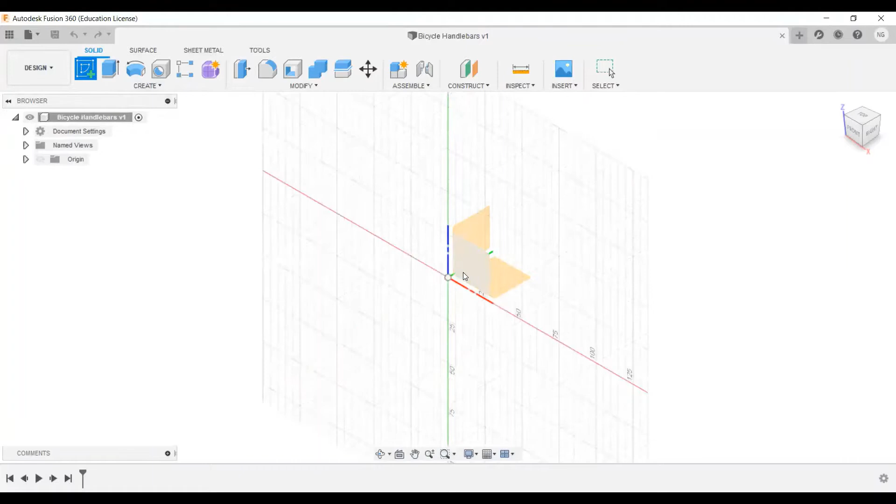Okay, everybody, so we're in a new model file. In the design environment, I'm going to go and save this as bicycle handlebars into the admin project in the cloud. Hit save. So we've got a fresh new design file now. Okay, so I'm going to go right ahead and create a sketch. I'm going to pick this front plane. It brings it normal to view.

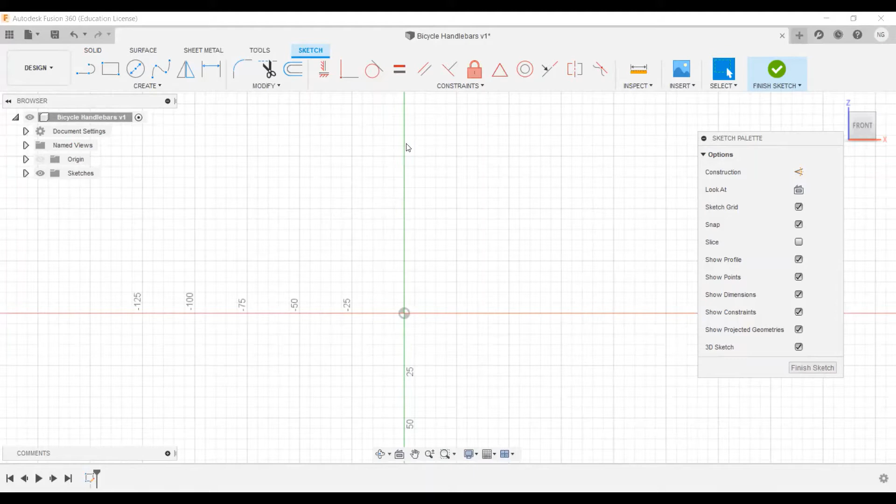Now, looking at the sketch tools last week, we were just able to sketch in 2 dimensions, so either on a flat plane or a flat surface. For these, we're going to need to create a 3D sketch. Now, when this sketch palette comes up here, if you notice at the bottom, there's a 3D sketch that's unchecked. I'm going to go ahead and check that. Now that's going to enable me to start sketching in 3 dimensions. So when I hit line, you'll start to see these kind of additional control functions coming up.

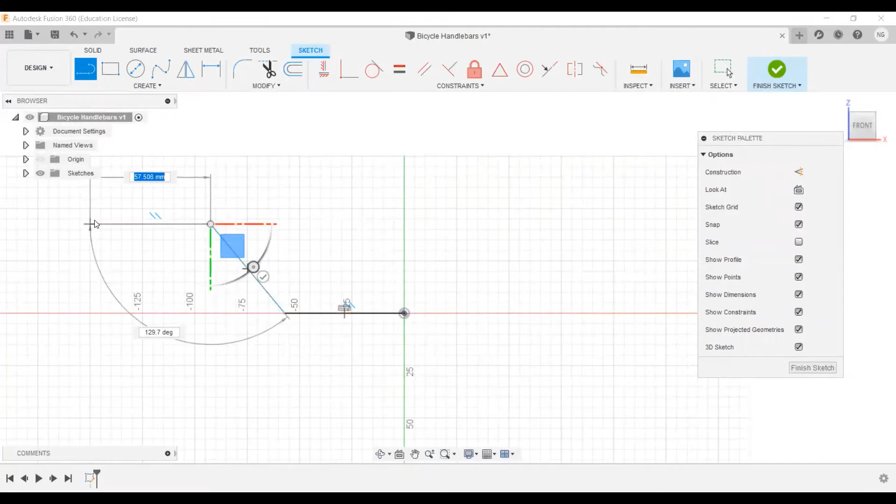Okay. So I'm just going to create 3 lines, just like that, and hit finish sketch. So right now we've just got a 2D sketch because I just sketched it all on the same plane. Click on front to bring it normal to view again. I'm going to go to the history tree here at the bottom, right click that sketch and edit.

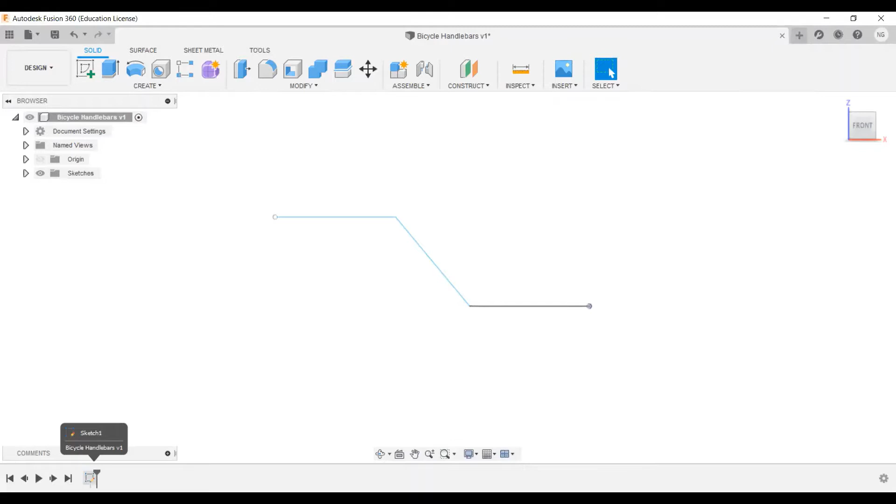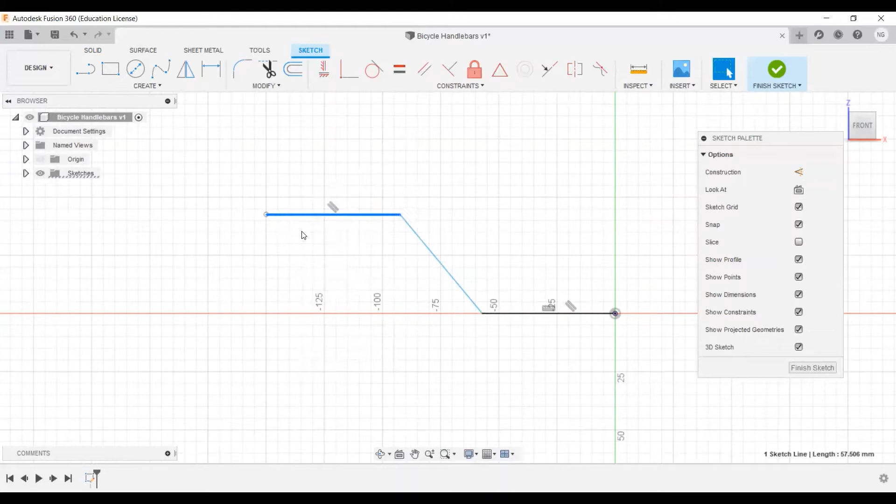Now what I'm going to do, I'm not going to dimension this just yet. If this end of the line here is the end of the handlebars, if you like, I'm only modeling half of this for the moment. I'm going to take this line, I'm going to right click it and hit move copy. I'm going to spin it round, I'm going to move it backwards from its plane by 30 millimeters and hit enter. Okay, so now we've got this 3D sketch basically.

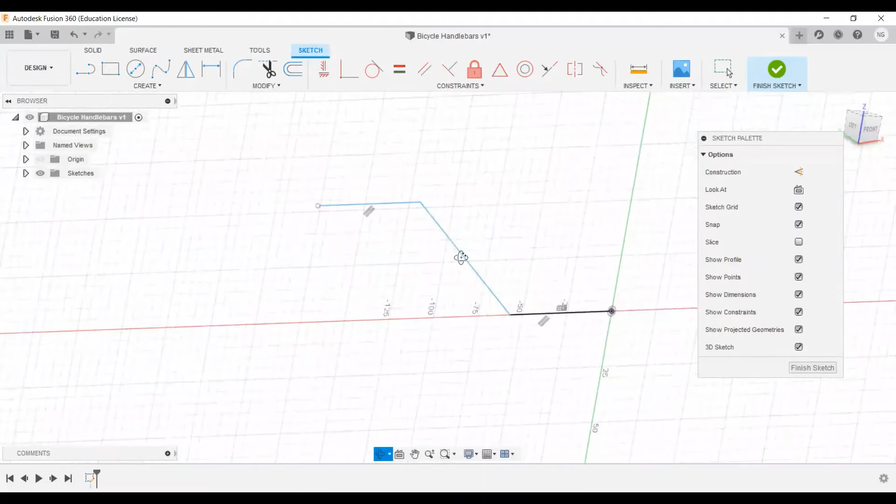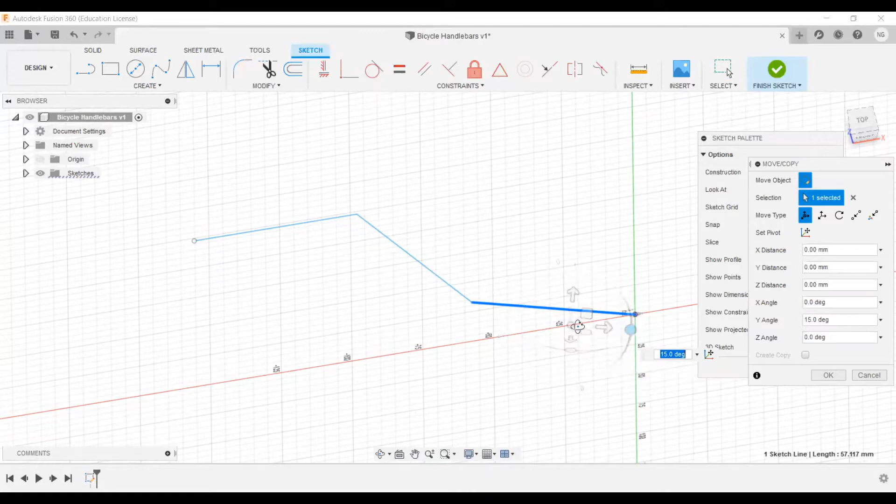The other thing I'm going to do is right click on this end and I'm going to move copy and I'm going to move that a little bit by 15 degrees in this plane here. Okay, and hit enter. So I'm going to go normal to the front view again.

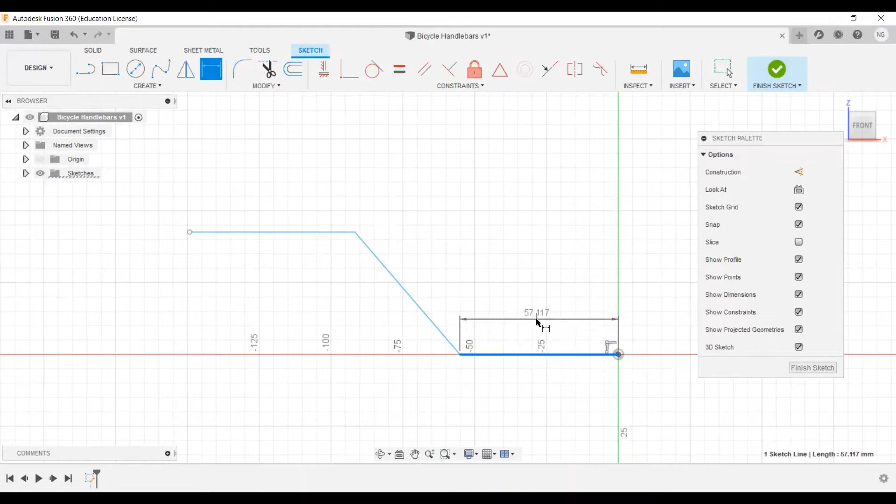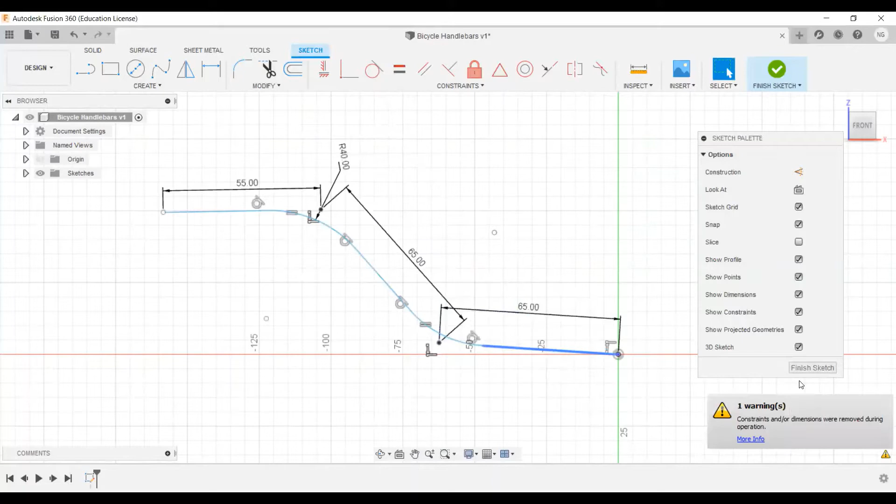Now I'm going to add some dimensions to these. I'm going to make that line 65 millimeters. I shall make this line also 65 millimeters and this line 55 millimeters. I'm then going to put 2 fillets on, one on that corner, one on that corner, and I'm going to make that a 40 millimeter radial fillet and hit enter. Okay, so now as you see, we've got this kind of funky 3D sketch shape. Okay.

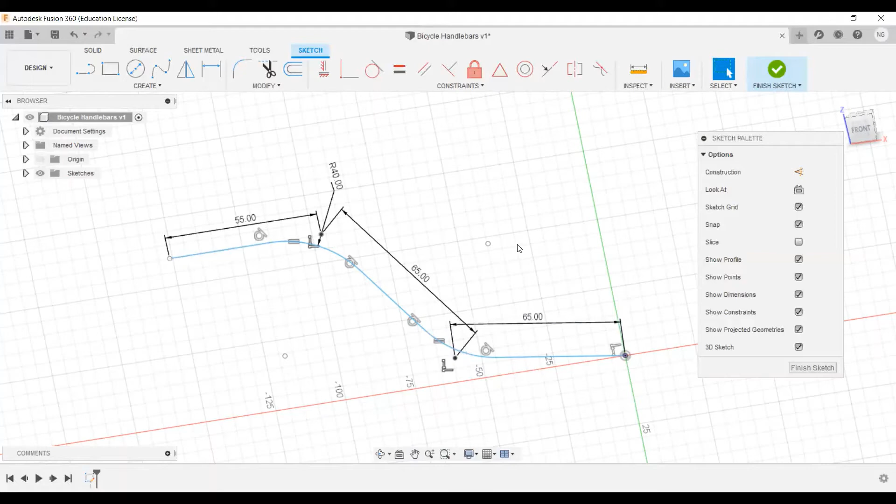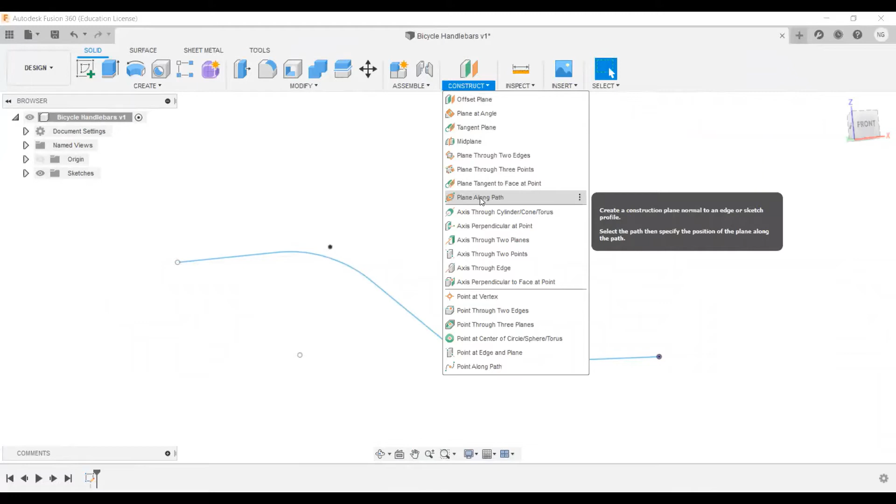Now I want to sketch some geometry at the end of this path, either end. There isn't a suitable plane in our origins, so I'm going to have to create a plane. If I finish the sketch first, I go up to construct, and I'm going to put a plane along path as we did last week. I'm going to select this path, and much like last time, it gives me a decimal place along the path. I'm going to make that 1 so that it's right at the end, or I could make it 0 and it will be at the other end. Okay. So now we've got a plane perpendicular to the end of that path.

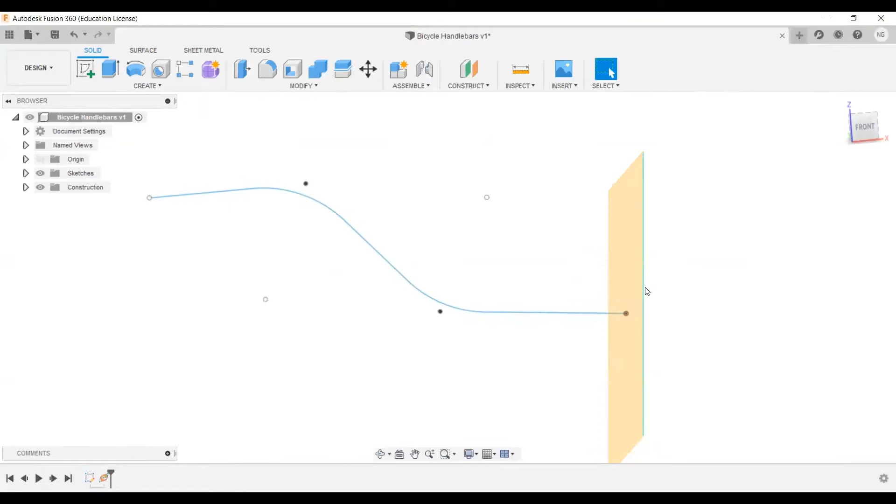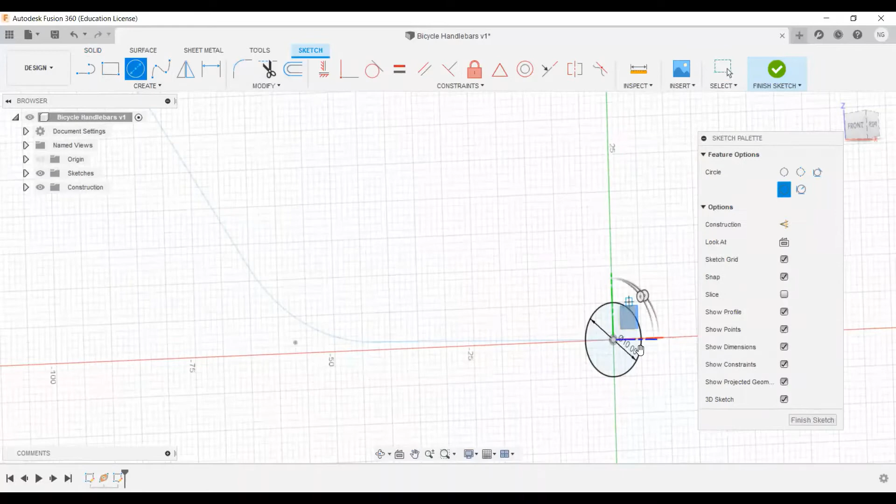I'm going to sketch on that plane, the newly created one, and I'm going to put a circle there. And it's going to be 10 millimeters in diameter. Zoom in a bit, and another one inside it, which is going to be 6 millimeter diameter. And I'm going to finish the sketch.

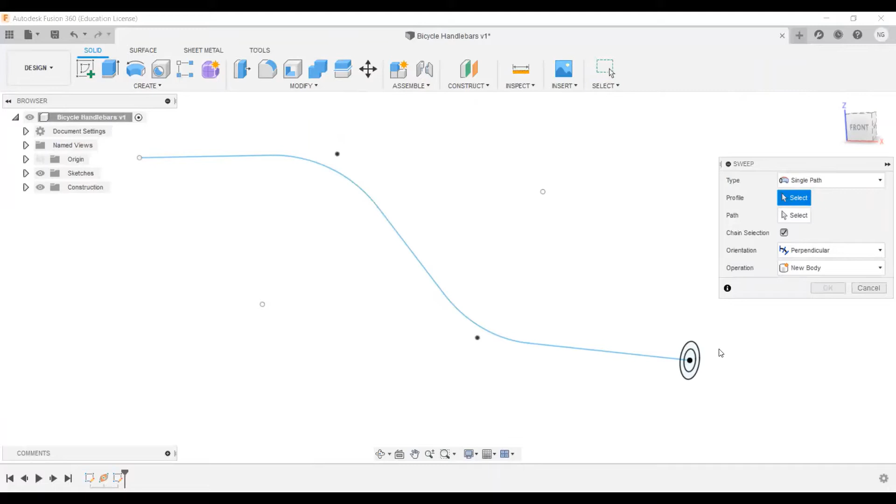Now I'm going to use the sweep command. I'm going to keep it on single path. It's asking me to select the profile. So I shall select that annulus there between the two circles, and then I'll hit select path and I'll choose the path. And as you can see, we've got the start of our handlebars. I'm going to keep the operation as new body and hit OK.

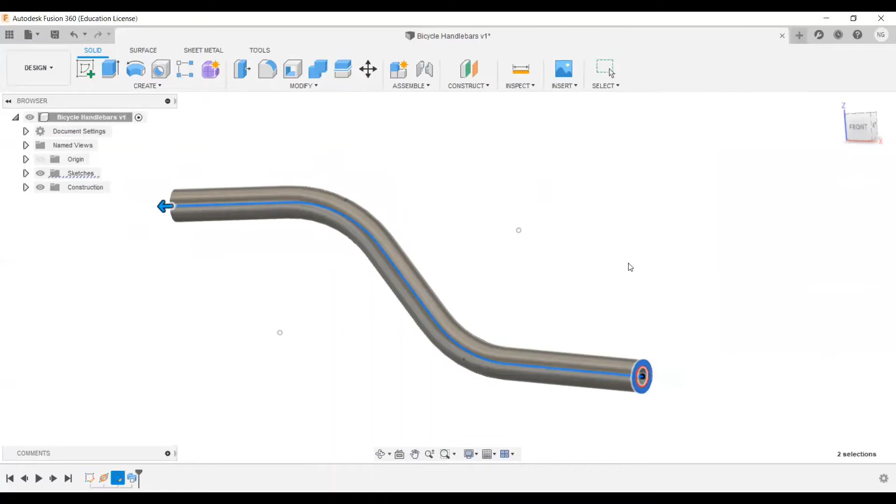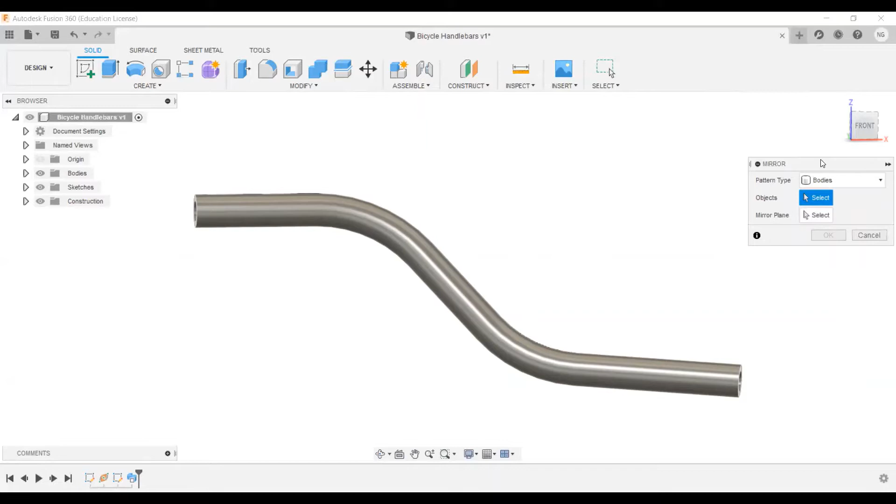All right. Now I am going to mirror that or reflect it. If I go to the mirror command, pattern type is set to faces, or it's defaulted in this case to faces. I'm going to choose bodies. And then I'm going to pick the body as it's asking me to. Select the object. And I'm going to click select the mirror plane, and I'm going to choose this end face just here. And hit OK. There we go.

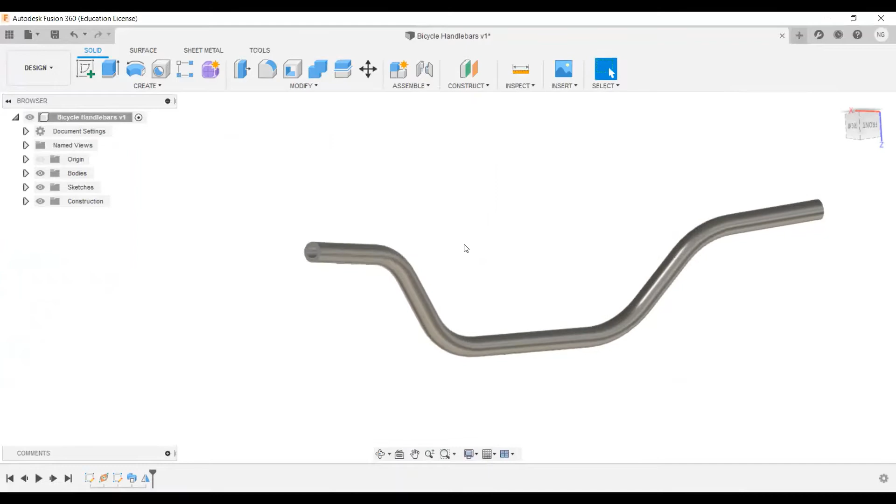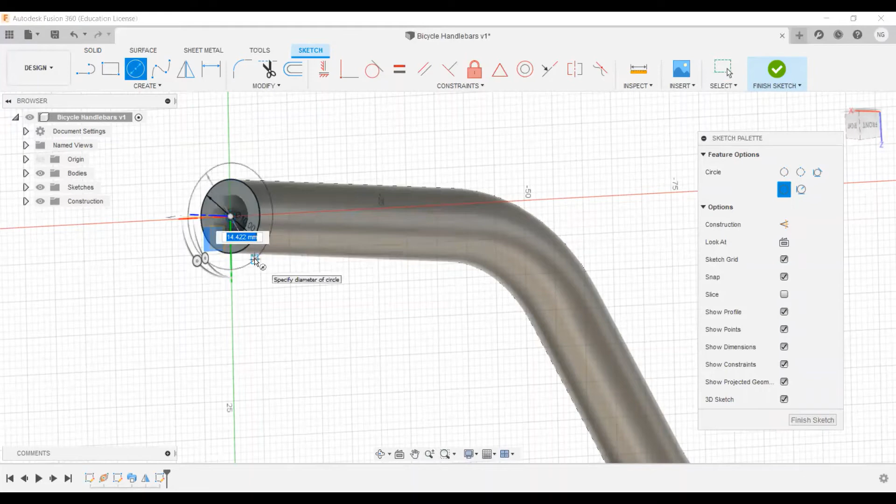Now for the handle grips. So I'm going to create another sketch on this end face. And I'm going to make a circle of 10 millimeters. And another one of 14 millimeter diameter. And then I'm going to finish that sketch.

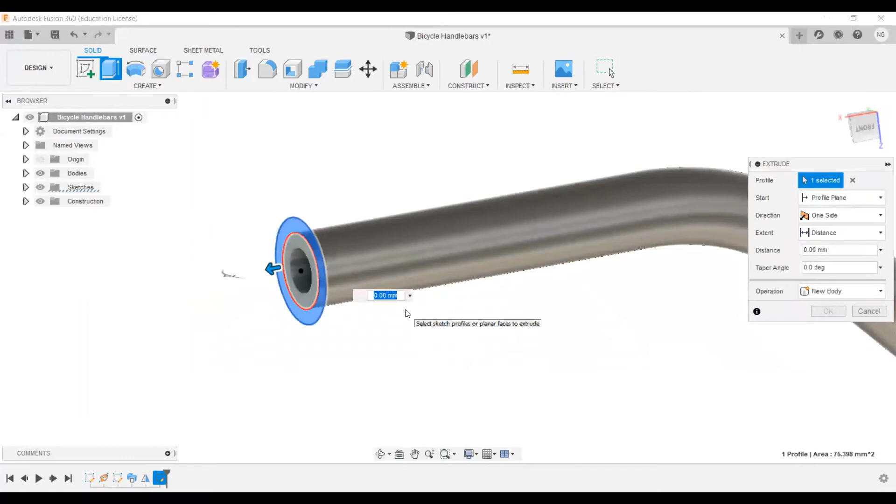Now I'm going to go to the extrude function. And I'm going to select, again, those two circles to give me the annulus. And I'm going to go backwards, so -40. And I'm going to choose the operation as a new body, so to separate it out from the actual handlebars. And hit OK.

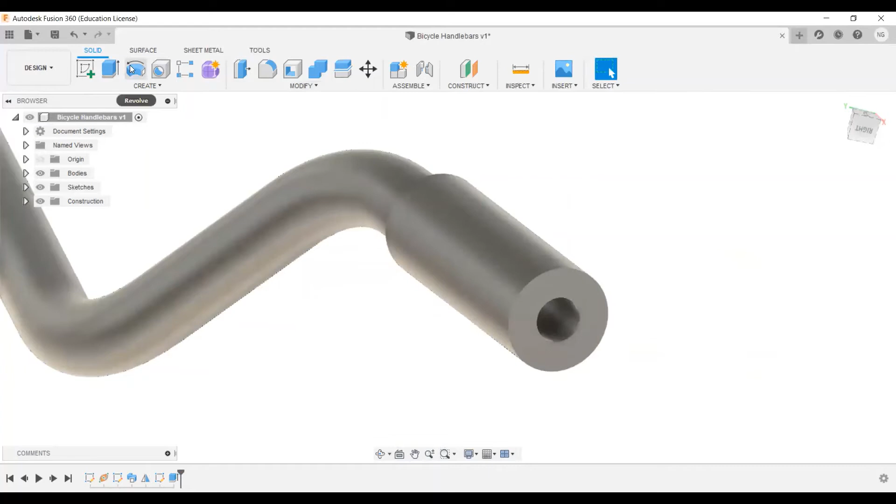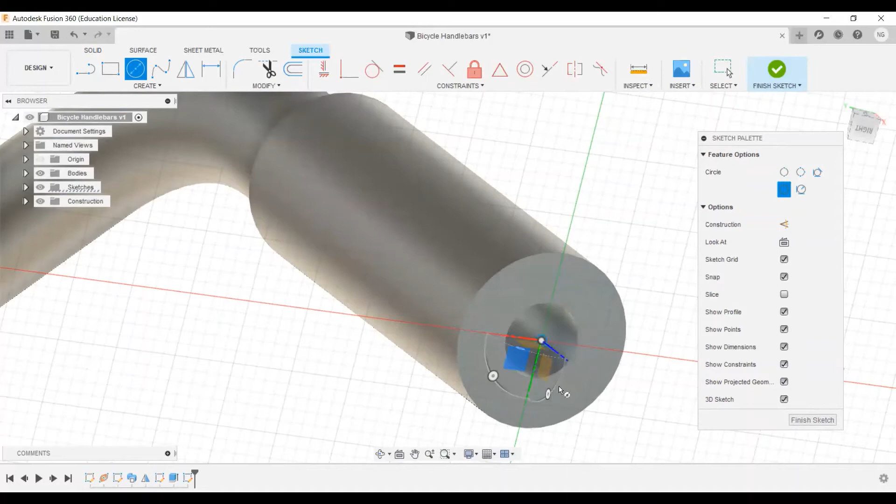And then I'm going to sketch on this outer surface, the part we've just made. And I'm going to click a further circle. Which will be, sorry, start that again. Delete that sketch. Try again. Sketch there, make a circle. And make that 12 millimeter diameter. And finish the sketch. And I'm going to extrude that.

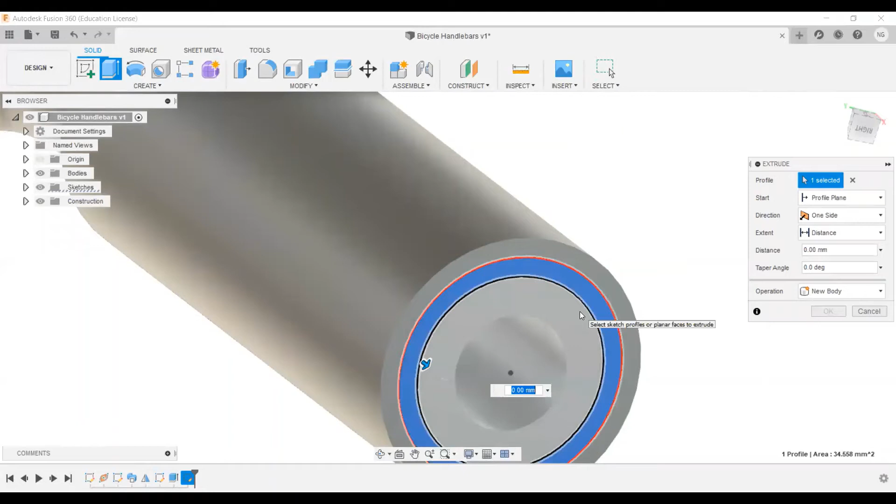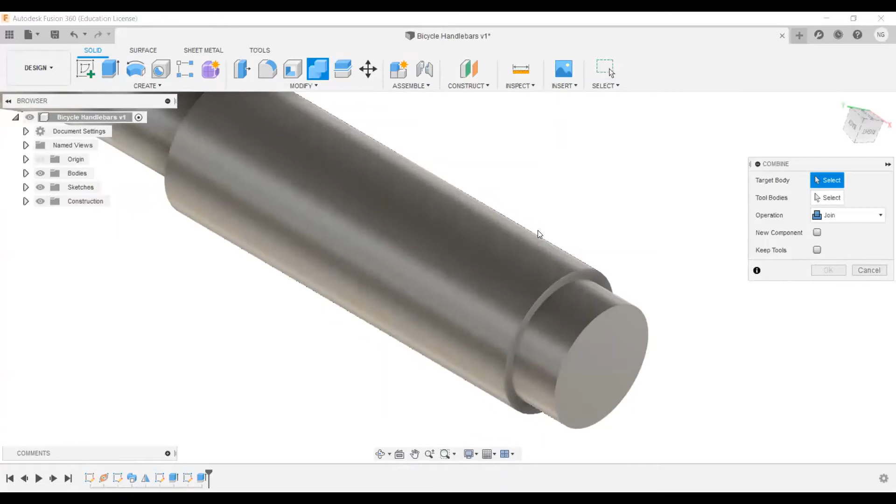I'm going to have to pick both of those for the moment. So what I shall do is create that as a new body, and I'm going to extrude it 5 millimeters. Change that back to new body and hit OK. I'm then going to go and use, in this modify area, this combine function, because this is a standalone body. I'm just going to combine this body with the main handle. So the target body is this, and the tool body is that, and it's a join command. Okay.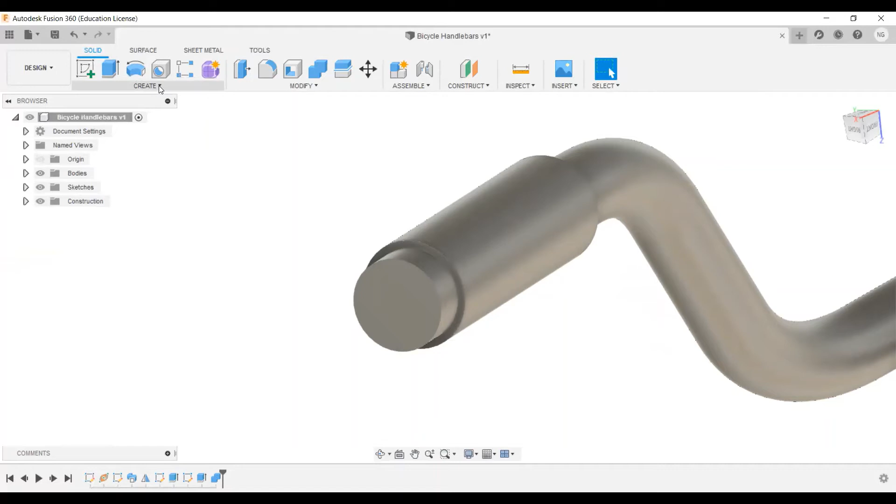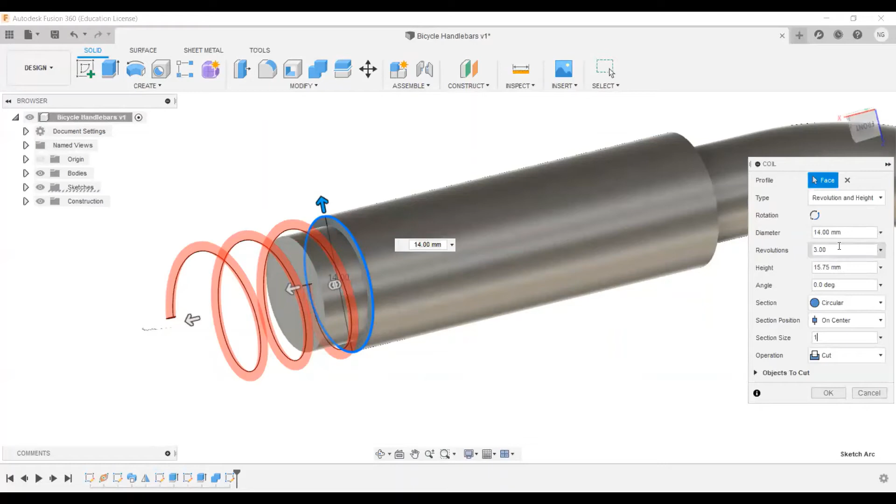Now I want to put like a knurled effect on the hand grip. So what I'm going to do is to use the coil tool. I'm going to sketch on that face, choose the center, and make it 14 millimeter diameter. Okay. So the diameter is set at 14 millimeters, the outside shape. I'm going to make the section size 1 millimeter. I'm going to make the revolutions 0.5.

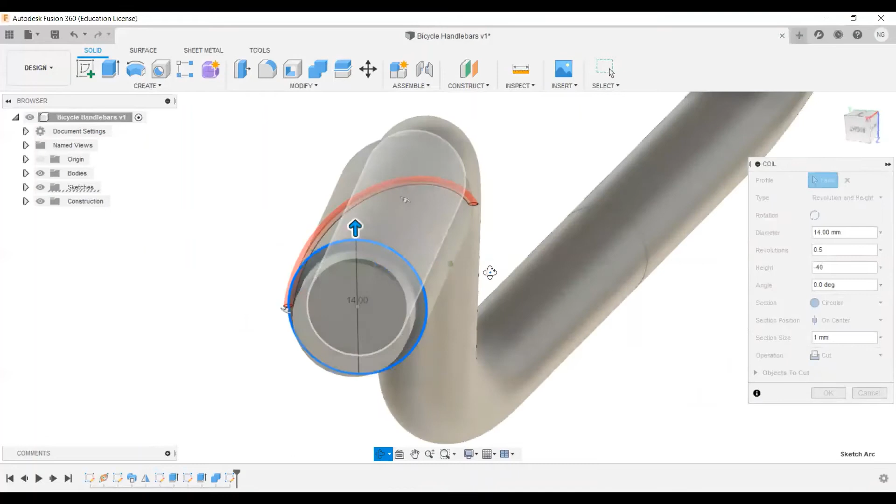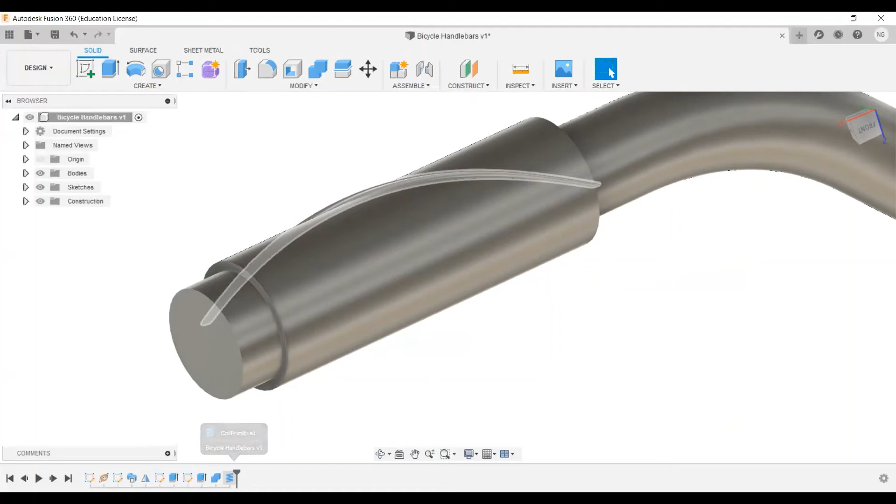The height will be -40. So I want it to go back into the part. And it's not going to be a cut, it will be a join. No, actually, I'm going to make that new body and hit OK. Sorry about that. If you just hit join and then hit OK, just go back into the coil here, edit the feature, and you can change that back to new body. Okay.

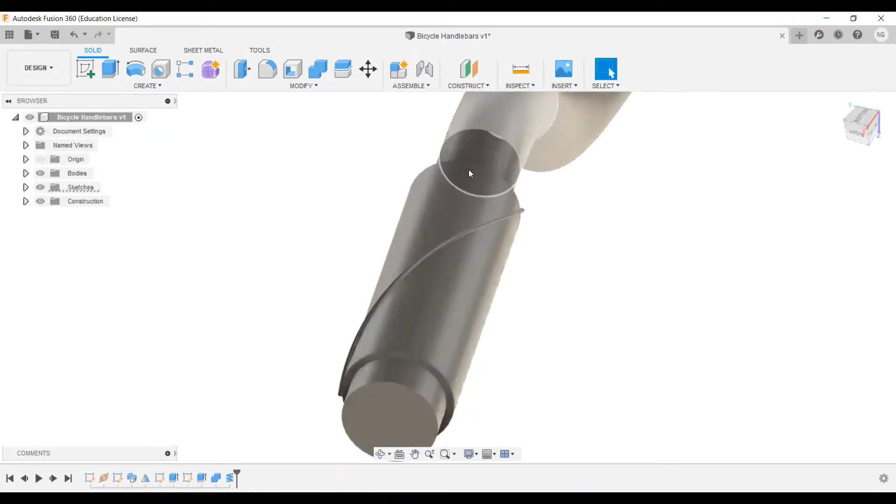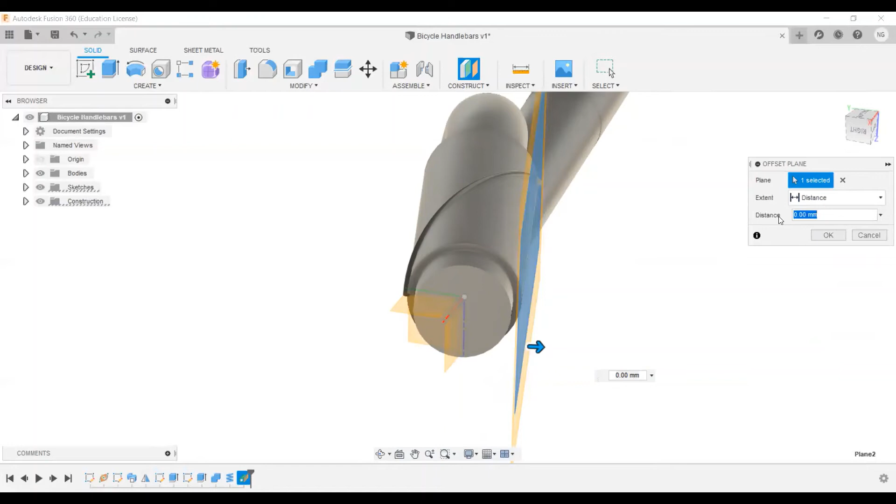I then want to reflect this new feature on itself. I'll show you what I mean. I need a plane going straight through the center here. So I shall first of all make a plane tangent to this face. I'm not going to change the angle, I'm just going to say yes. So you can see that plane is touching that face now. I'm then going to offset this plane I just made by -14. So we've got 2 planes either side of this handle. Say yes to that. And then finally do a mid plane, and I shall select these 2 planes. Hit OK.

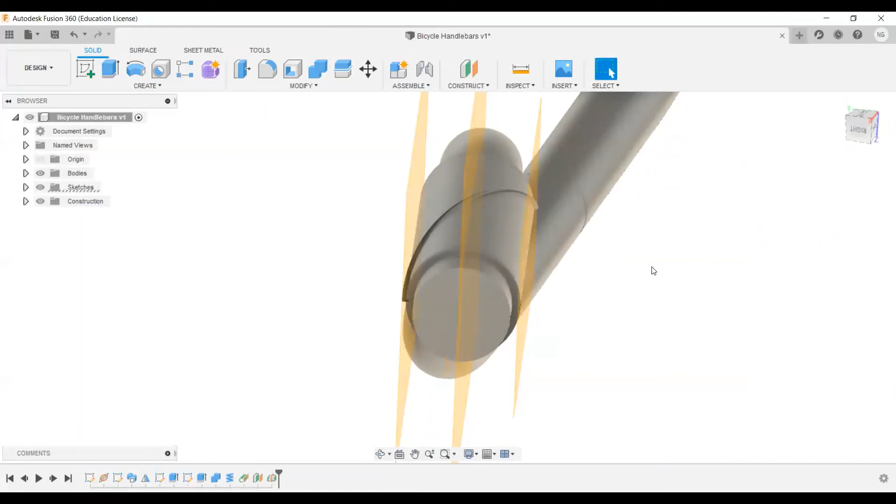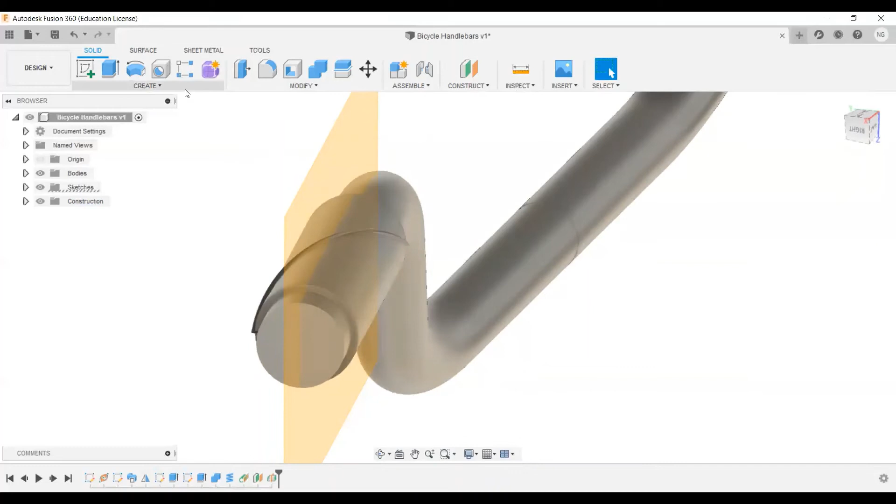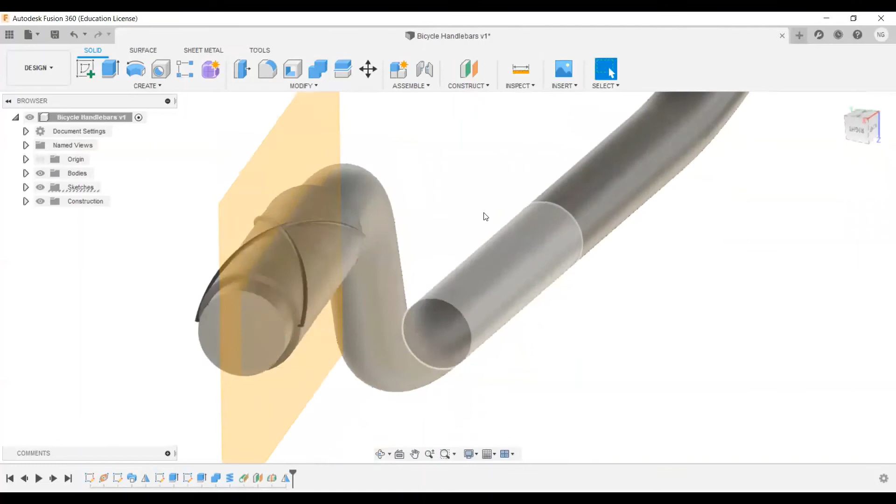Now I don't need these outer planes, so I'm going to right click and show hide, right click and show hide. Oops. It doesn't delete them, it just hides them. Now I'm going to go back into the mirror function, and I want to mirror a body, which I shall choose this helical feature, and the mirror plane I shall select is this one in the middle, and hit OK. Once I have that, I'm going to right click this plane and hide that also. If it doesn't disappear immediately, just click into the background and it should disappear.

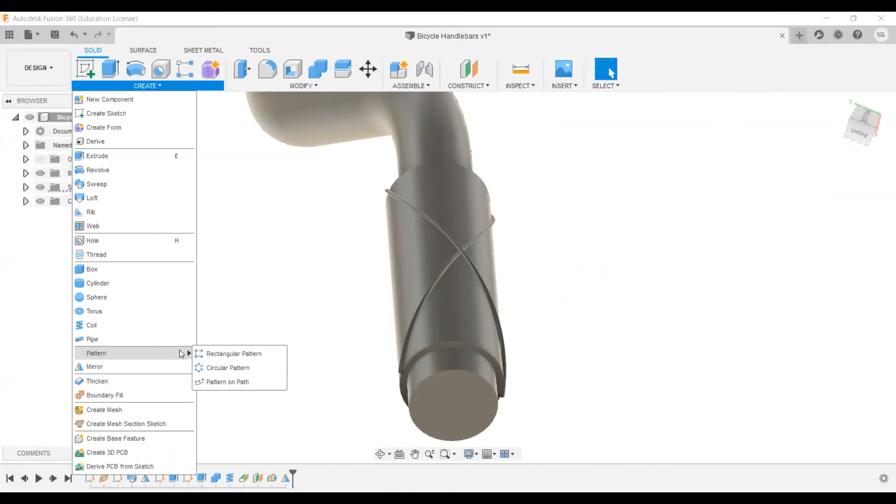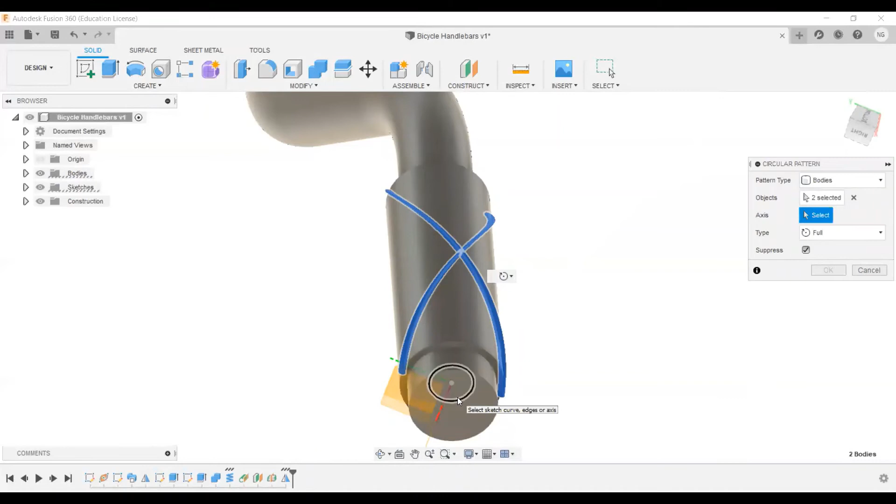Now I'm going to use a brand new function that we haven't looked at yet, which is pattern. It's under create, and I'm going to do a circular pattern. I'm going to change the pattern type to bodies so I can pick these 2 objects. It wants me to select an axis here, and I'm just going to choose any of those circles, because it should recognize that that's the center. The center of the circle is the axis.

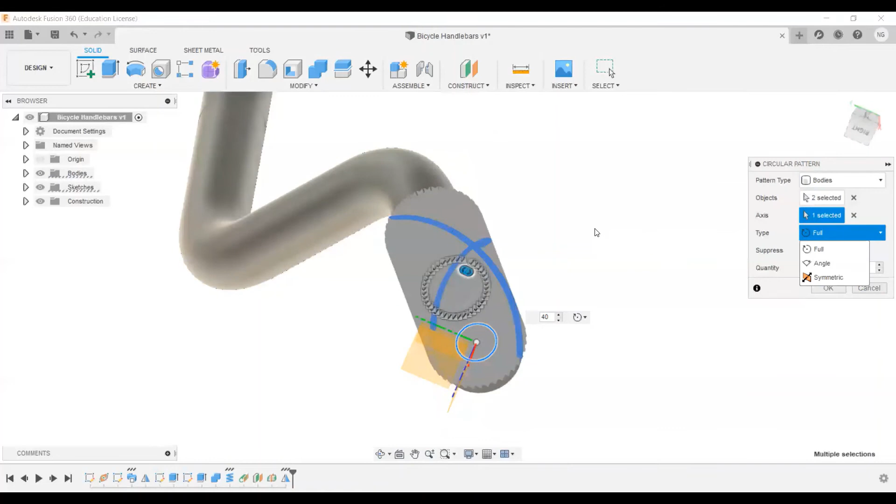And how many of these? I'm going to make 40. Okay. And the type is fully around. I could set that to some angle, 180 degrees round. I'm going to make it 360 degrees and hit OK.

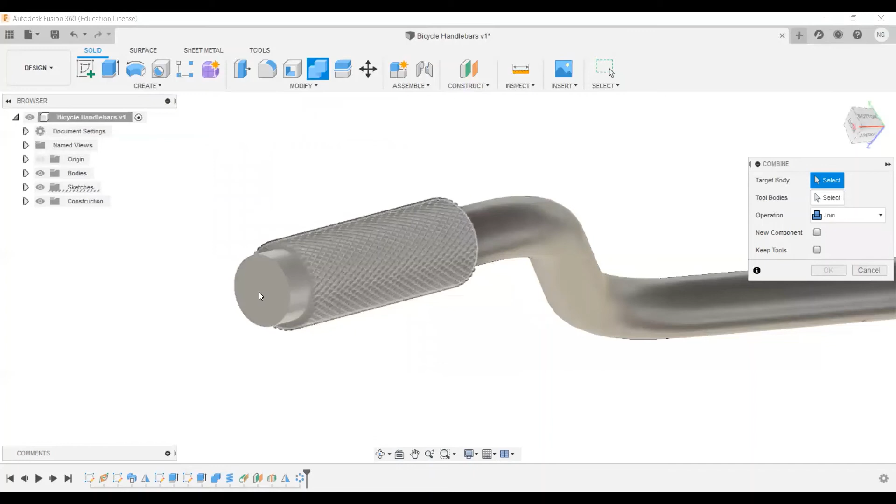And as you see, we've got this knurled effect. Okay. Now, these are all individual bodies now. So what I need to do is join them into the actual handle itself. So if I pick combine, I'm going to pick the target body as the handle. Now I'm selecting the tool bodies and I'm just going to drag the window round to try to capture all of those at once. That's going to take a little time.

And once this is completed, I can go and reflect or mirror this handle via the center so that it reflects it onto the other side. So it tells me in tool bodies now that it's got 80 selected. That makes sense. So we had 2 and we made 40 copies of 2. And I'm going to keep the join operation on and hit OK. Again, this may take a few seconds. I apologize for my processing power.

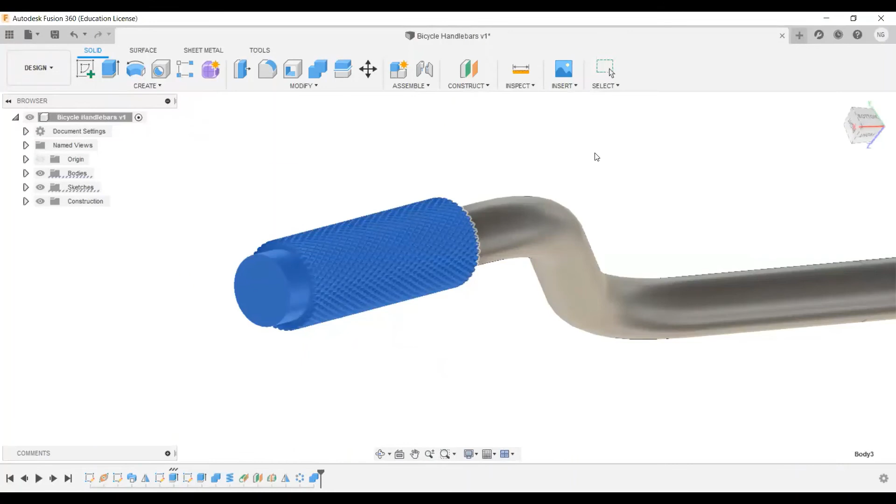So after we've reflected this handle grip, we're then going to take this part into the render mode and assign some material and see how it looks. Okay, I think that's pretty much done now. So I should be able to mirror that across the central plane. I haven't joined these 2 handlebars together yet, so I can do that afterwards.

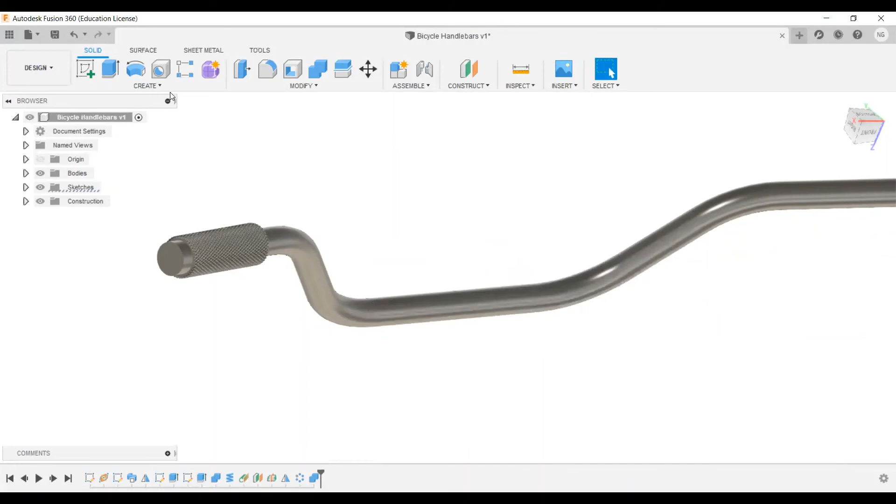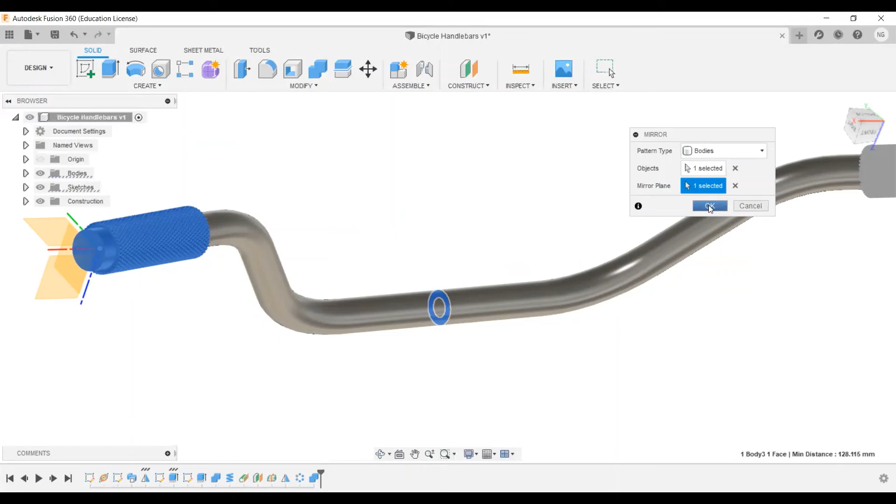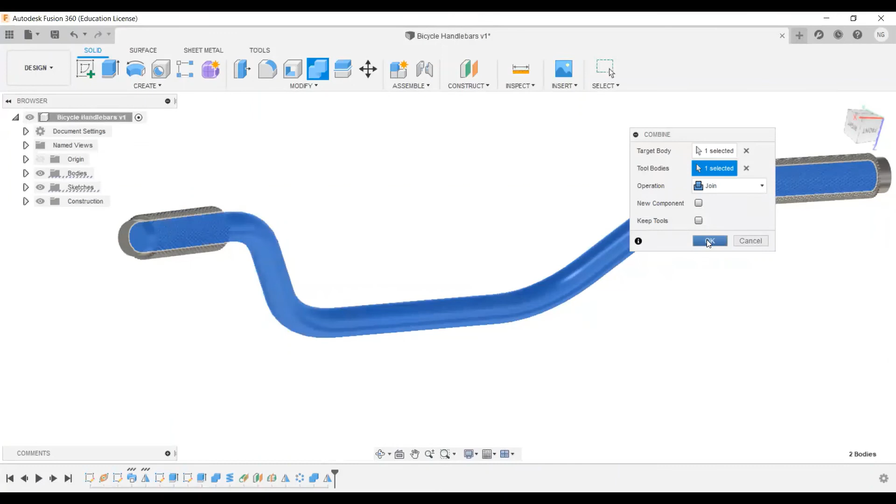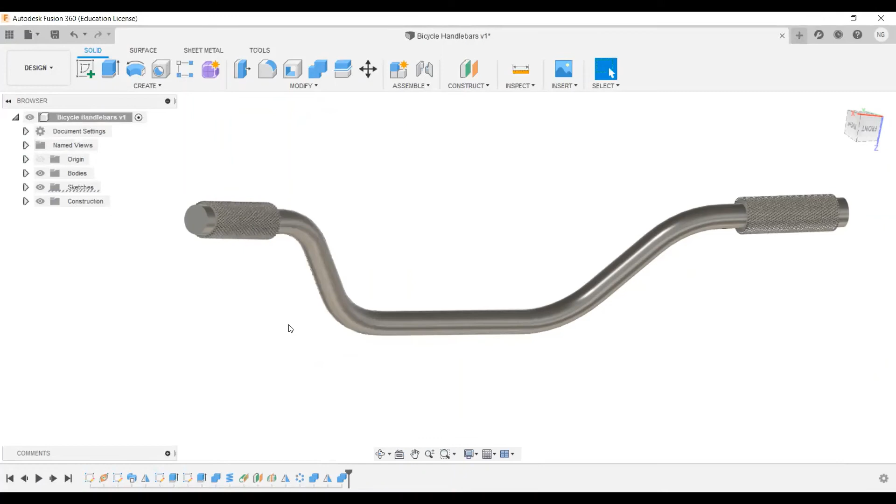I want to assign some material before I go into render actually, so I'm going to go down to the modify pull down, go to appearance, and I'm going to open up, so if I've got Fusion 360 appearances, I'm going to open up metal and aluminum, or aluminium in my country, in England. And I'm going to choose aluminum polished, and I'm just going to drag that onto this part.

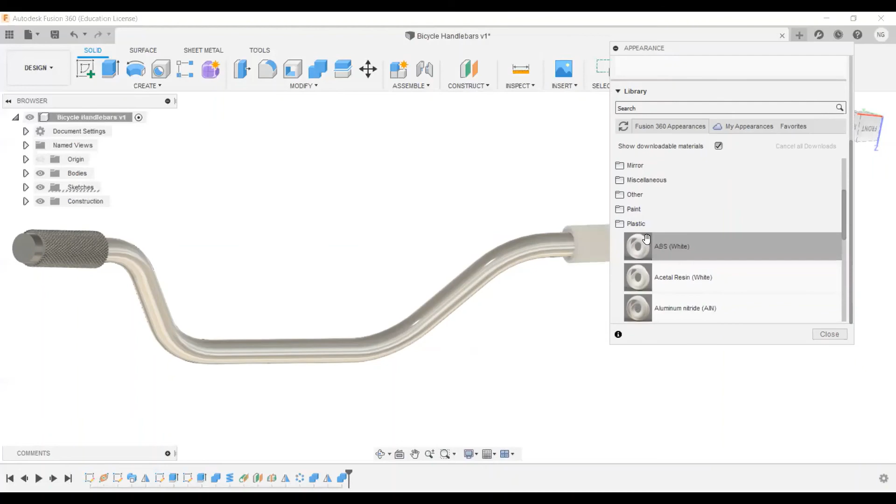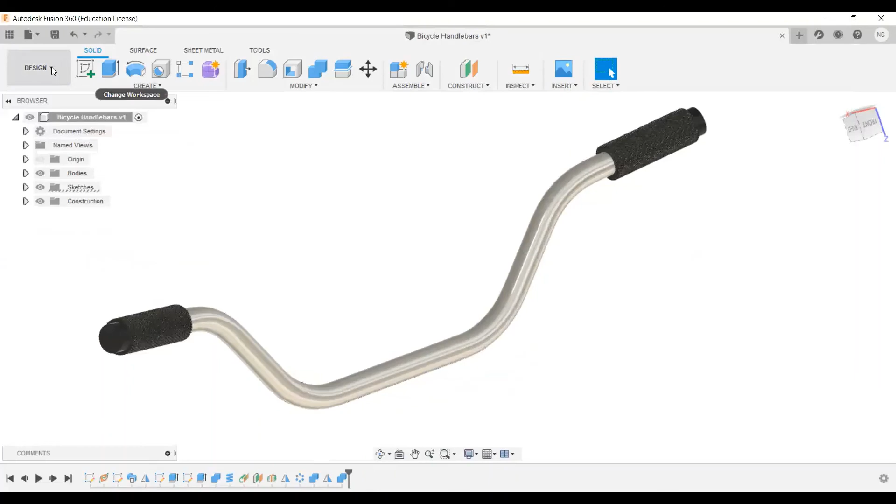I'm then going to go to plastic, and I'm going to drag ABS white onto each of these grips. And that ABS white shows up in the design. This is all the materials that are used in this design. I'm going to double click it and turn it almost black and hit done. And there we have our handlebars, but we're not quite finished yet. I'm going to go into the render mode out of design environment. Gives you a slightly better view.

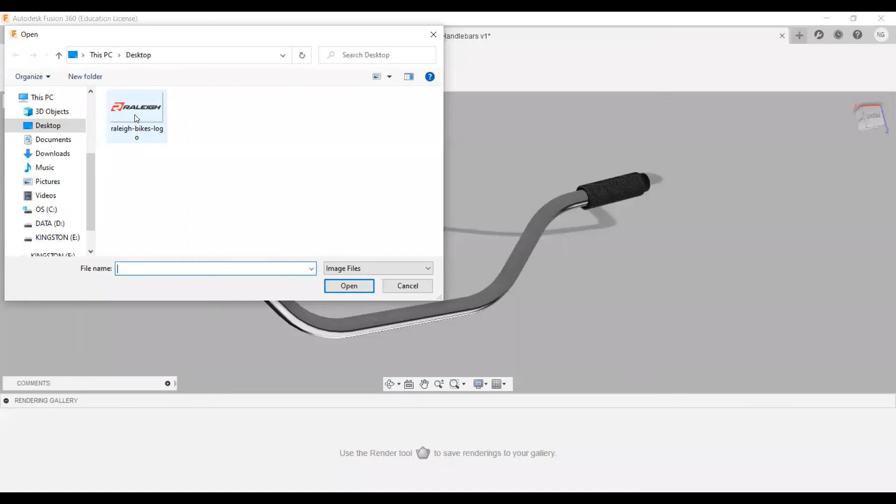I downloaded a Raleigh bike logo just from the internet, first one I found, just to show you this decal setting. I can insert that from my computer. It's just on my desktop. There it is. Click that, hit open. Now it's asking me to select a face to pop that onto. I'm just going to choose the central section of the handlebars. There you go, you can just see it there.

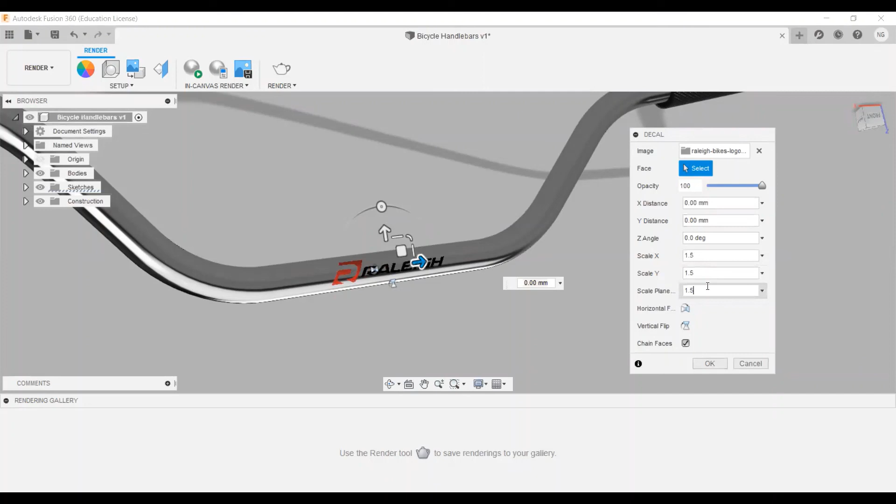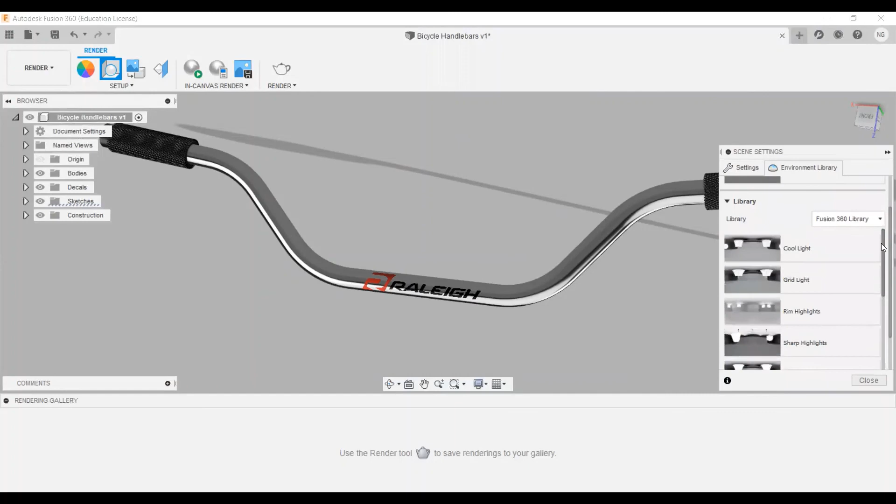Slightly too small, I'm going to make it 1.5. Scale it up in X, Y, and Z. Well, I'm happy with that. You can play around with the opacity, but we're not too interested. Just hit OK. And there we have our handlebars. And as before, we could do an in-canvas render. We could play around, first of all, with the scene settings. You can change the environment and the light source. Okay. I'll leave you to have some fun with that.

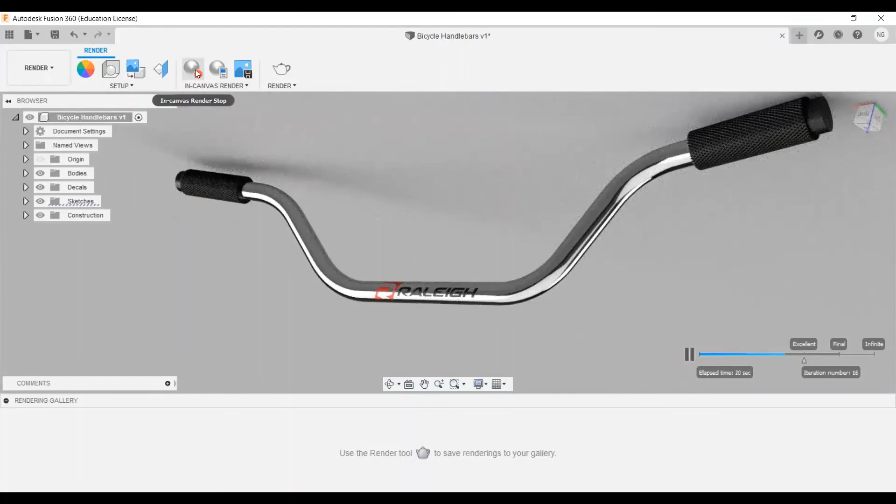And just hit in-canvas render. Let's twist that a little. That starts giving you a sort of a presentation type image. It takes a bit of time, but we'll get slowly towards excellent. But for now, I'm just going to stop that render. So those are our handlebars. And finally, I shall go back into the design environment and save the model file. Just give it a version description. Hit OK.